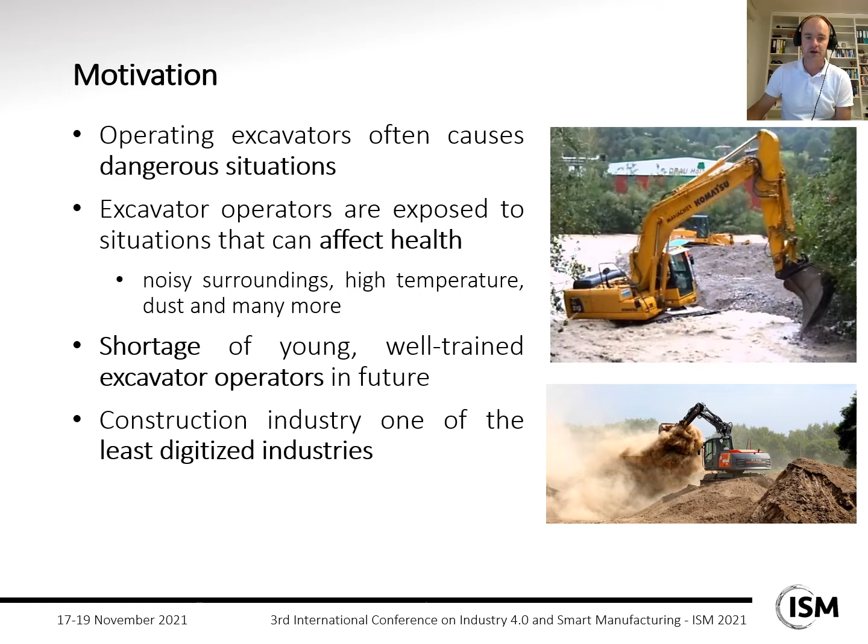Also, the construction industry is the largest sector worldwide. It is one of the least digitized industries. However, digitization could make an enormous contribution to safety and lead to more comfortable working environments. A first fundamental step towards the vision of Construction Site 4.0 is the necessary equipment of construction machines with corresponding sensor technology, which enables a multitude of automation possibilities.

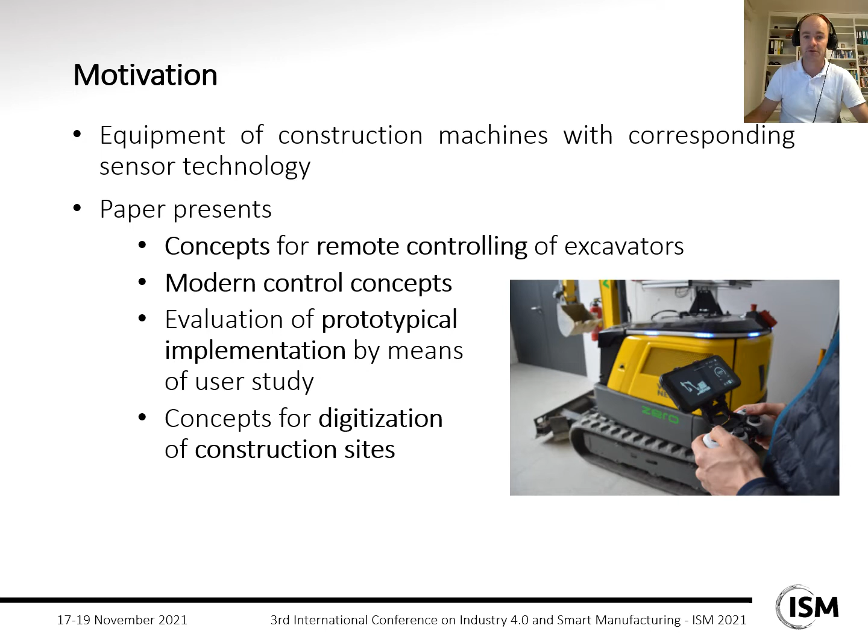Construction equipment manufacturers are currently experimenting with ways to remotely control excavators, among other things, to keep excavator operators out of the immediate danger zone, e.g. during demolition work. The focus of this paper is not on the hardware level, but on developing and evaluating visualization concepts for remote controlling of excavators. These concepts are then prototypically implemented and evaluated by a user study, used to derive further steps towards the vision of Construction Site 4.0, like teleoperation of excavators.

As already stated, we conducted the project together with Wacker Neuson. It started in October 2020 and ended in June 2021. Within the framework of a human-centered design process, a first prototype was developed, where the excavator can be controlled with the help of a PS4 controller, and corresponding information is visualized on a smartphone directly mounted on the PS4 controller.

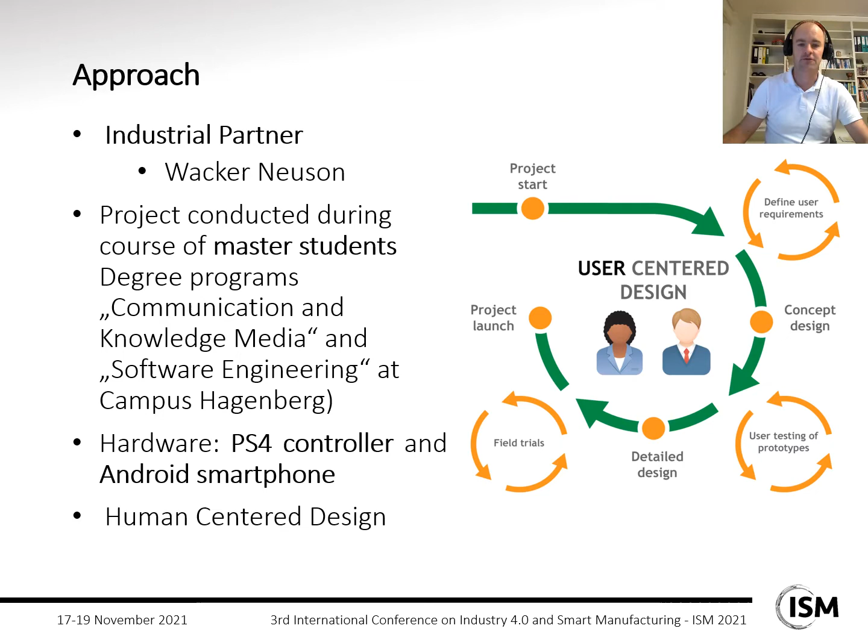To understand the context of use, we conducted interviews to gain insight into the processes involved in operating an excavator, as well as specific requirements of the excavator operators that need to be visualized in an according user interface. In addition, important environmental influences and the rules on construction sites could be learned in order to identify important dangers and problem areas. Unfortunately, only 3 persons could be interviewed due to the strict COVID restrictions. All 3 persons were experienced male excavator operators.

The findings can roughly be divided into the 2 sub-areas, UI elements and control. Concerning UI elements, one opinion that was expressed by all test persons was that the engine temperature, the cooling water, the fuel level and the engine speed should always be displayed. In addition, information on the stability of the excavator would also be necessary, e.g. whether there is a danger of tipping over. Furthermore, information on the hazards in the tipping area or in the surrounding area should be visualized.

Test persons can well imagine to control the excavator via a PlayStation controller. However, care should be taken to ensure that several buttons do not need to be pressed simultaneously to achieve the desired result. Another aspect that might complicate the operation is if the excavator reacts too fast or too slow to user input, meaning that sensitivity should be configurable. Additionally, it is of utmost importance to minimize latency, meaning that the response of the excavator must be in near real time when corresponding buttons are pressed on the controller.

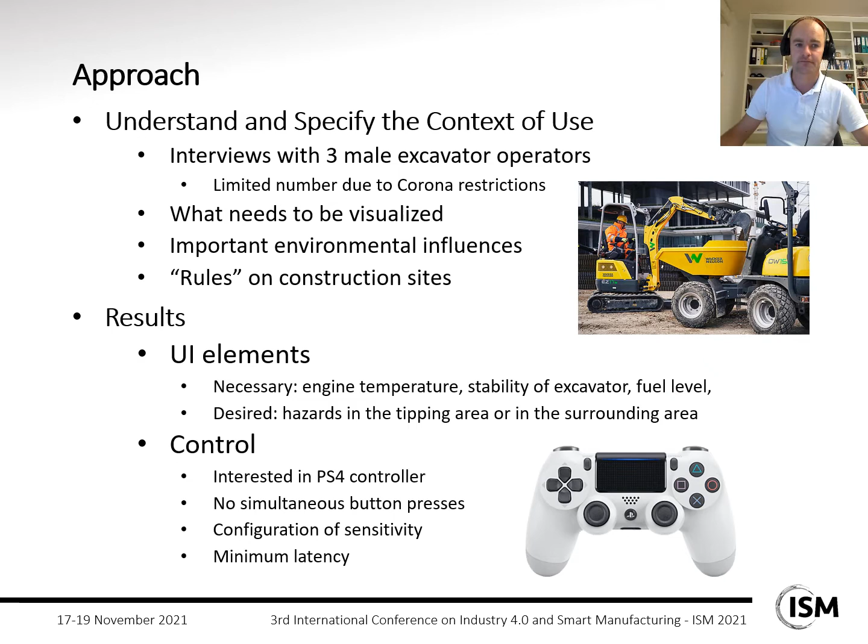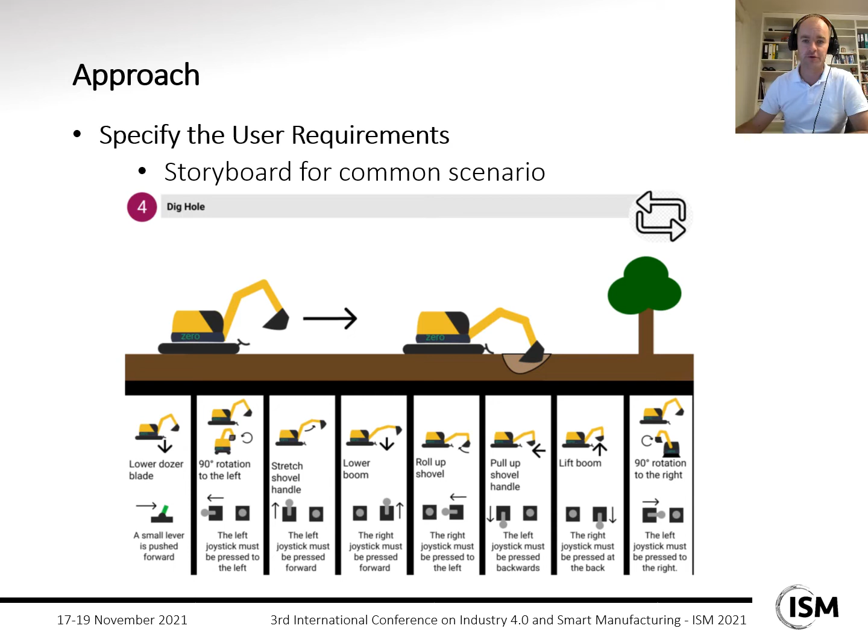In order to derive requirements, the main findings of the interviews were clustered. We then formulated user stories and visualized them by drawing a storyboard as shown in the picture. Thereby, we mainly focused on a common scenario, digging a hole with the excavator.

Several hardware solutions were considered for controlling the excavator in the remote scenario. These included VR or AR glasses, a joystick, and connected devices such as smartphones and tablets. Due to availability and realistic feasibility, a PS4 controller was finally chosen with an additional attachment of a smartphone.

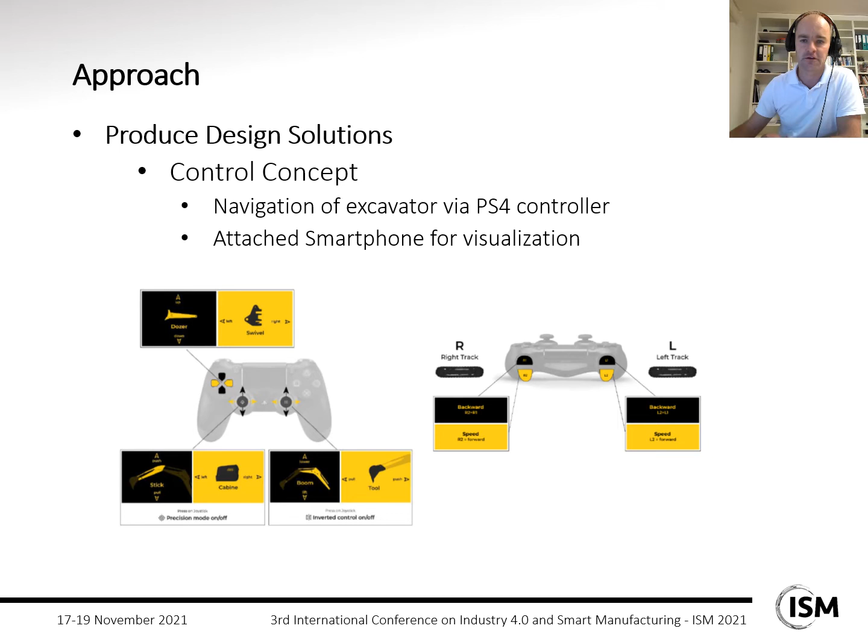The button assignment for controlling the excavator using the PlayStation controller was already specified according to the standard ISO norm, which we applied for our design and the prototype.

In order to be able to view the working area accurately, an overview of the surroundings is suggested, e.g. the working area or where material may be thrown in. Additional information about hazards in the working area is also considered, e.g. power lines or water lines. This representation is proposed for the preparation phase.

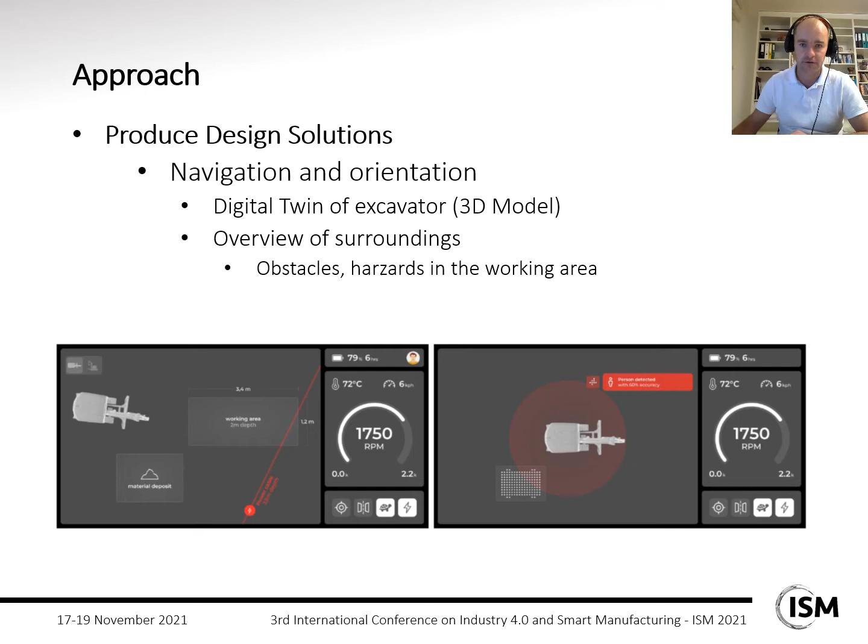To distinguish different notifications according to their urgency, they have been divided into three categories: notification, warning, and blocker. Notifications do not require any further action. A simple short beep is sufficient to inform the excavator operator. Warnings indicate a fault that is not yet relevant for safety. For this purpose, the visual notification should be reinforced by vibration and a signal tone to draw attention to the fault.

Blockers are safety-related notifications that require immediate action. Therefore, they are highlighted in color and supported by a strong vibration of the controller and a loud alarm sound.

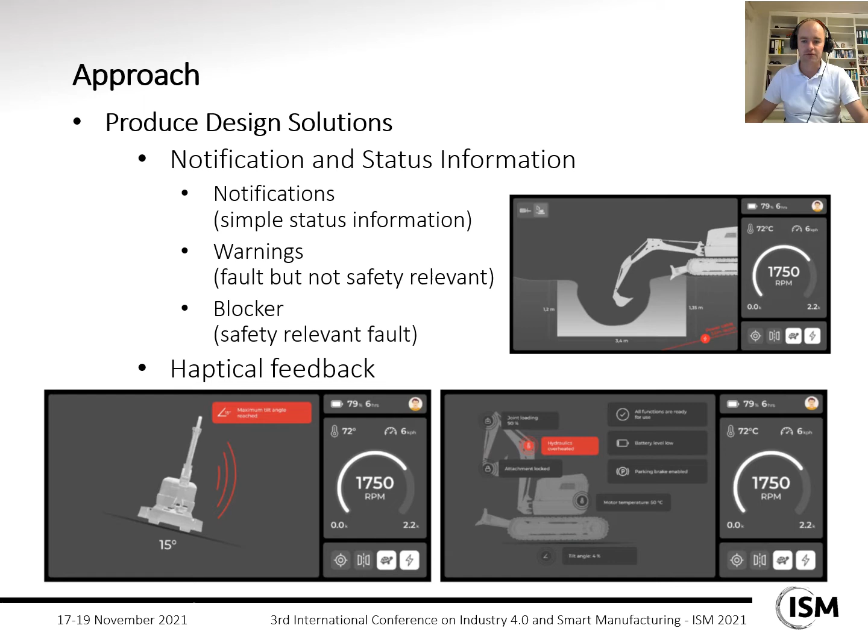If the excavation process begins, a lateral view is recommended, as this allows the depth of the pit to be seen and possible obstacles to be viewed from a different perspective. It would also be good to have a visualization of the current as well as the desired target state in order to know whether the digging process is finished or not.

The prototype is implemented in Unity. The excavator was a prototype which will be continuously equipped with new controllers and sensors. Currently, the excavator can receive commands from the PlayStation controller and translate them into movements of the excavator. The communication is done via the WebSocket protocol. The digital twin on the smartphone can be moved accordingly, and data regarding the state of the excavator can be displayed.

Due to the lack of sensor technology, the concepts for navigation and orientation, visualization of the excavation, and individual notification and status messages could not fully be implemented in the first version of the prototype. Thus, some of the interfaces presented before remain on a conceptual level.

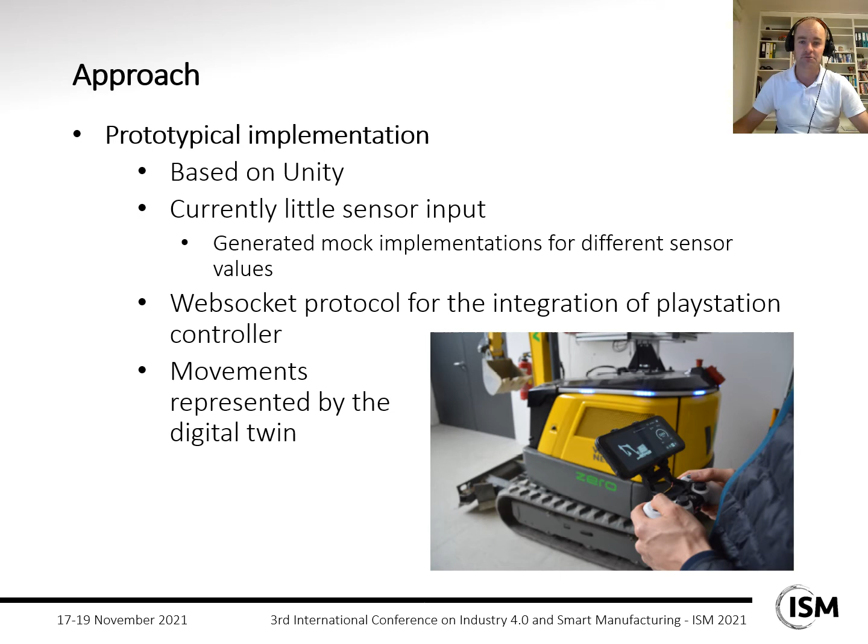The designs as well as the prototype were repeatedly discussed and tested with developers and people from Wacker Neuson to ensure that their requirements were met. Finally, the prototypes and design concepts were tested by excavator operators in a real environment.

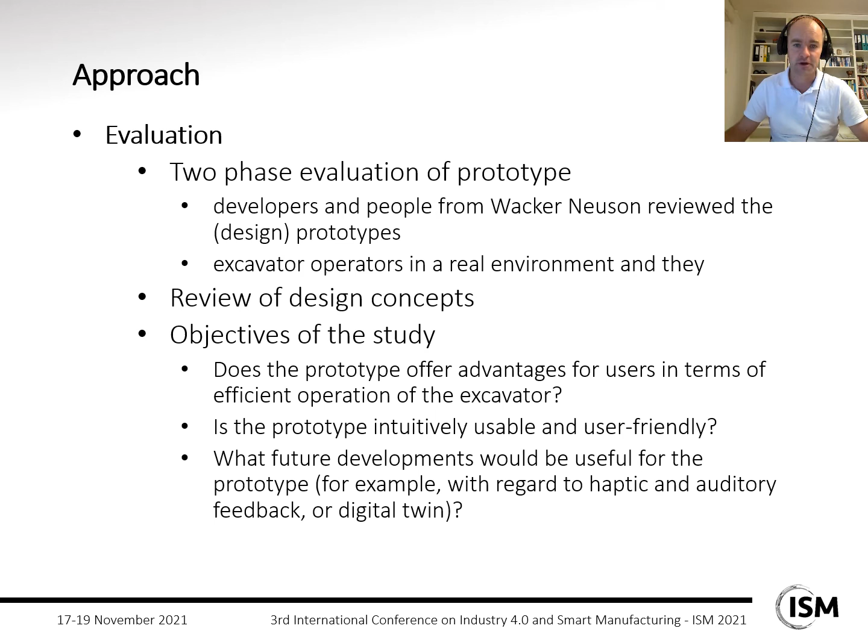The following rough objectives were defined as objectives of the user study. Does the prototype offer advantages for users in terms of efficient operation of the excavator? Is the prototype intuitively usable and user-friendly? What future developments would be useful for the prototype?

The user study was conducted with 3 test persons due to COVID-19 restrictions and lasted about 90 minutes per person. First, the PS4 controller was introduced with the help of the digital twin. Within a few minutes, the essential functions and assignments could be learned in a playful manner.

Subsequently, the test persons were asked to perform the following tasks using the prototype and the physical excavator. First, move the excavator to the excavation location, meaning turn on the excavator, raise the dozer blade and move it there. Second, dig a hole and dump the earth at the defined location. Finally, backing up and parking the excavator.

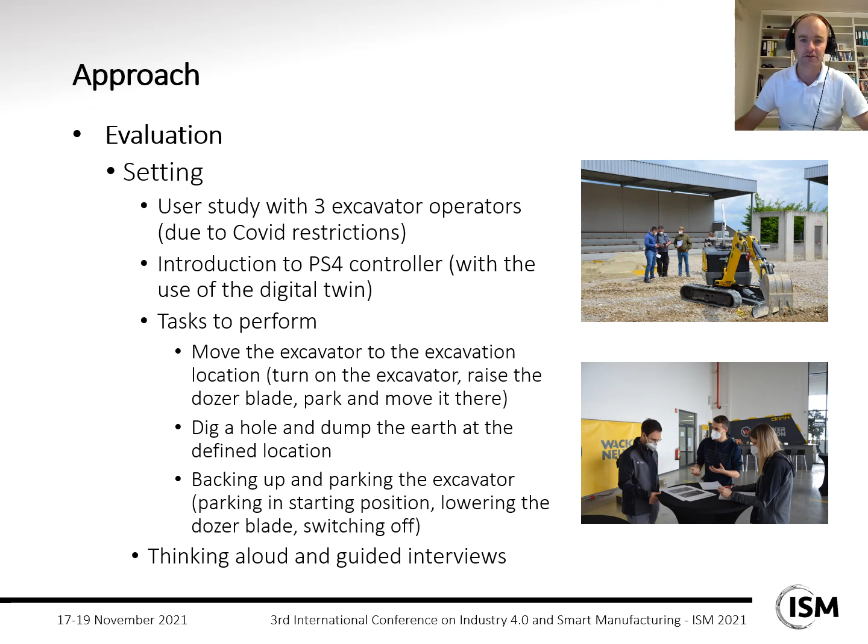The statements made by the subjects and impressions gained during the performance of the tasks were then recorded by an observer, meaning that the thinking aloud study was conducted together with guided interviews.

Concerning the results, the test subjects had a good feeling using the PS4 controller. However, the assignment of the controller was not intuitive for all test subjects. It should therefore be possible to configure the assignments of the control elements individually.

Considering the notification and status information, the view of the excavator from the side was not intuitive, and the display of the error location on the excavator was not relevant for most of the test persons. On the other hand, critical information should be visualized not only when occurring. For example, the tilt angle is important to see

during the whole operation. Concerning navigation and orientation, a visualization in which the excavator is directed upwards is more intuitive. The abstract representation of the obstacles is sufficient, as the type of the obstacles is irrelevant. However, the height of the obstacles is an important information that was missing in the concepts.

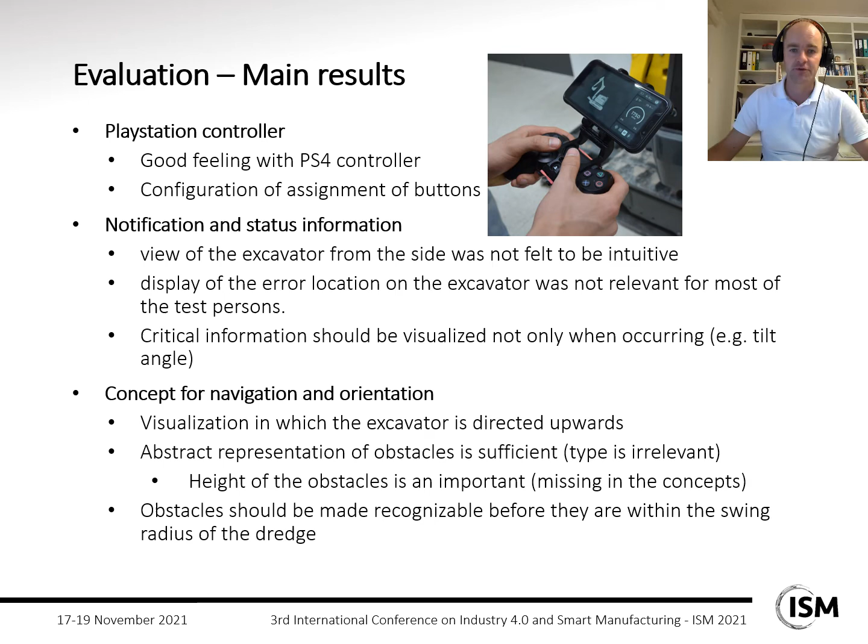Obstacles should be made recognizable before they are within the swing radius of the dredge, whereby especially moving obstacles should be highlighted and accordingly visualized. The indication about possible hazards is useful. Additionally, a visualization of the material type was desired, for example, to know how close the excavator can get to an excavation pit. In general, haptic feedback was desired, which was rarely included in the prototype.

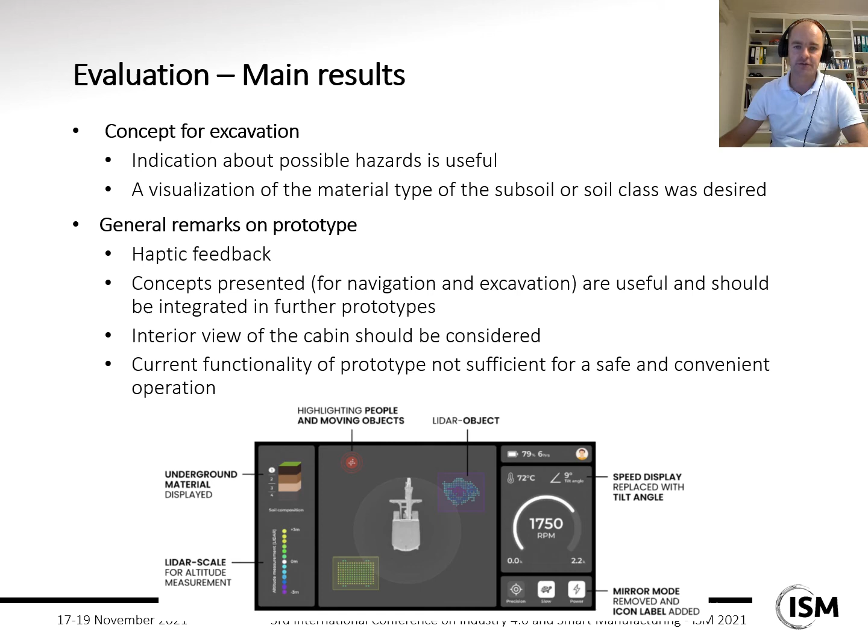The concepts presented for navigation and excavation were useful and should be integrated into further prototypes. Additionally, a display of the interior view of the cabin should be considered, as this is common for the test users. However, the current functionality of the prototype was not sufficient for a safe and convenient operation, especially if the field of view of the excavator is not that good.

Nevertheless, the results are a first step towards a digitized construction site. However, missing sensors hinder further use cases. Even in the remote scenario where the operator still can see the excavator, cameras were explicitly desired that show the exact position of the bucket or to provide a view into the excavation pit.

One promising technology that should be integrated in the near future is LiDAR. With this technology, the visions from the design concepts for detecting the environment could be realized. In a first step, we plan to simulate different sensors and test them in according user studies. More sensors may also allow to switch towards teleoperation.

Teleoperation does not require direct visual contact between the excavator operator and the excavator itself. Efficient transmission of stereoscopic 360-degree videos in real time is particularly important in order to achieve a realistic impression. Additionally, new multisensory forms should be explored, for example, force feedback, voice commands, or virtual touch for interaction with the aim of achieving a realistic experience.

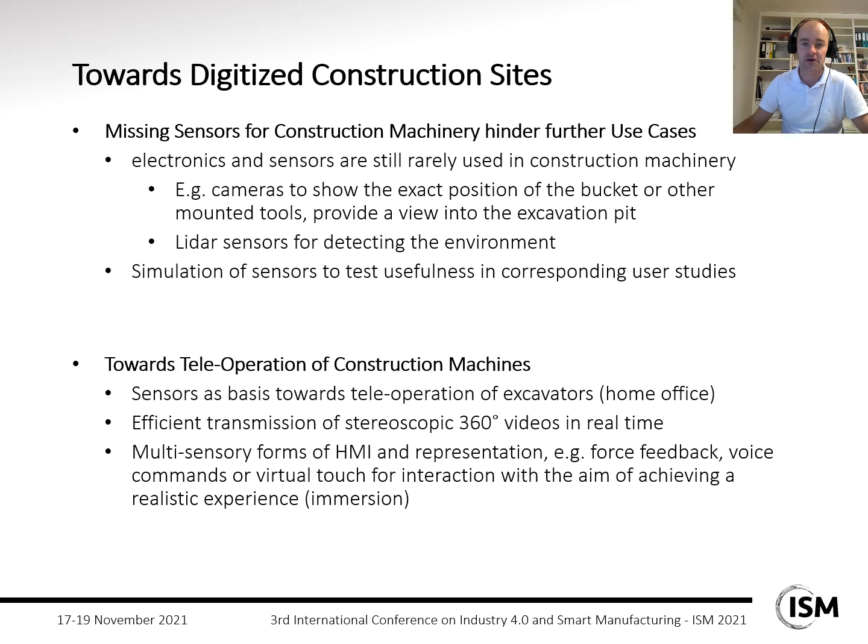Currently, missing or insufficient digital plans limit possible scenarios. For example, the courses of the excavation pit are usually marked by hand, which are usually not permanent and are often lost again in the course of the work. In addition, the corresponding measuring and marking is an error-prone work.

Finally, the excavator operator usually does not have detailed information about hazards in the subsurface, for example, water or power lines. Having such plans could ensure that excavation can be carried out at a low risk. For example, one could make use of GPS together with augmented reality technologies and various sensors on mobile devices to locate as well as visualize utilities in real-world scenes.

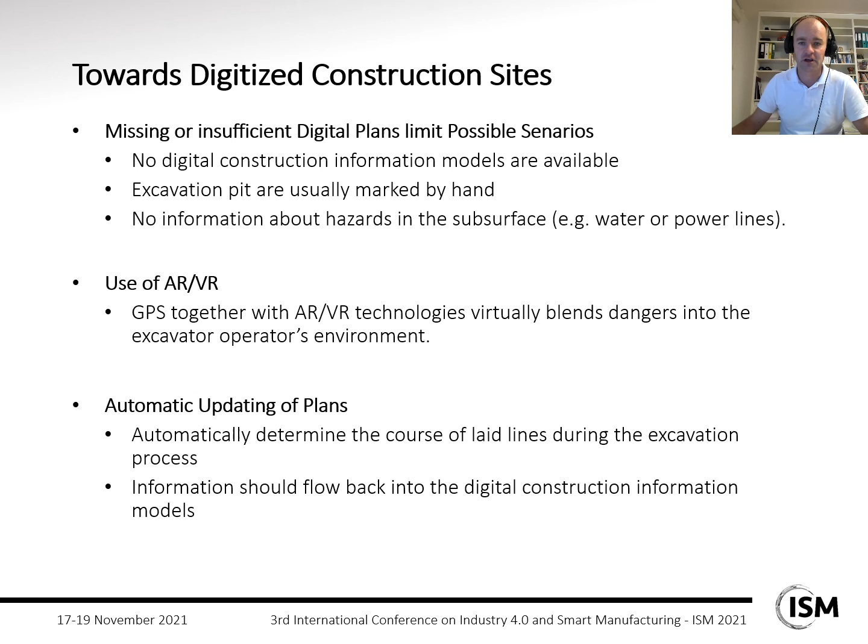It should not only be possible to display existing plans, but also to keep them up to date as automatically as possible. It may be possible to automatically determine the course of the laid lines during the excavation process. This information should then flow back into the digital construction information models as automatically as possible. In this respect, we believe that digitization in the construction industry is still in its infancy, needing further research.

So in this respect, we plan to continue our work with Wacker Neuson in the near future to get one step closer to this vision.